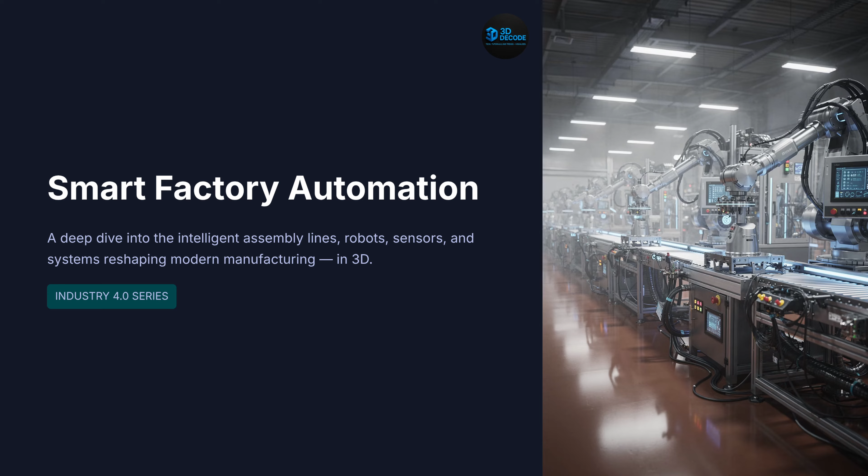Welcome to the smart factory. Modern factories are no longer just buildings filled with machines. They are becoming intelligent digital ecosystems where robots, sensors, conveyors, software, and AI systems operate together continuously. Every machine generates data, every process is monitored in real time, and every production step becomes measurable and optimizable. The factory itself is evolving into a living, connected system.

What is factory automation? Factory automation is the use of machines, robotics, control systems, and software to perform manufacturing tasks with minimal human intervention. Instead of relying entirely on manual labor, automated systems handle repetitive, dangerous, and high-speed operations with far greater consistency. Automation can range from simple conveyor systems to fully autonomous robotic production lines. The main goal is higher productivity, lower cost, improved quality, and greater operational efficiency.

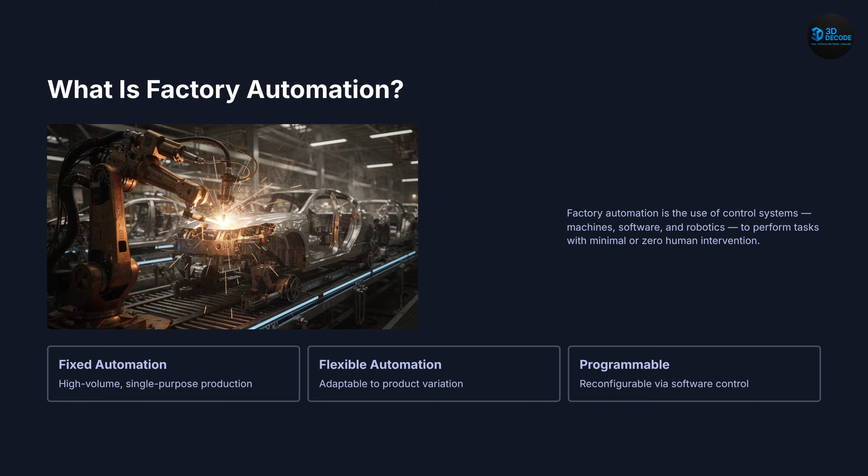Types of factory automation. There are three major categories of industrial automation. Fixed automation is designed for high-volume repetitive production with little variation. Programmable automation allows machines to be reconfigured through software for different products. Flexible automation goes even further by adapting dynamically to changing production requirements with minimal downtime.

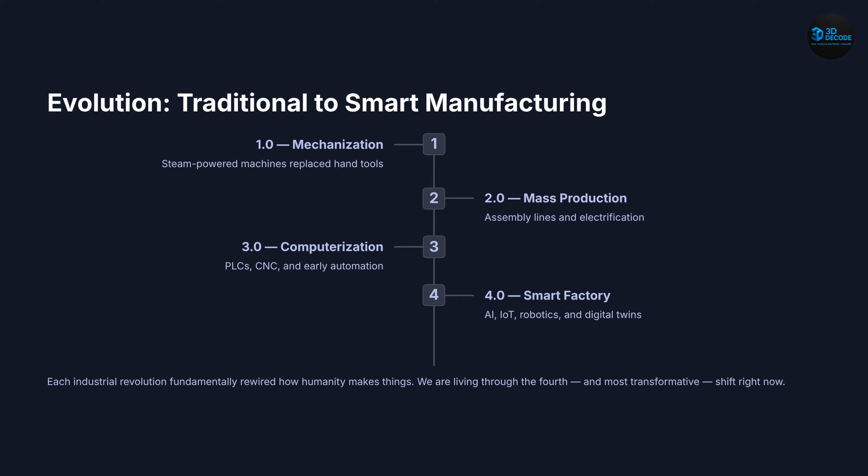Evolution of manufacturing, Industry 1.0 to 4.0. The history of manufacturing has passed through four major industrial revolutions. Industry 1.0 introduced steam-powered mechanization, replacing hand tools with machines. Industry 2.0 brought electrification and mass production assembly lines, while Industry 3.0 introduced computers, PLCs, and CNC systems. Today, Industry 4.0 combines AI, IoT, robotics, cloud computing, and digital twins into intelligent, self-optimizing factories.

What is Industry 4.0? Industry 4.0 is often called the fourth industrial revolution because it merges the physical and digital worlds together. Machines, sensors, software, AI systems, and cloud infrastructure communicate continuously in real time. Factories no longer operate as isolated machines. They function as highly connected cyber-physical systems. This allows manufacturing environments to think, adapt, predict, and optimize automatically.

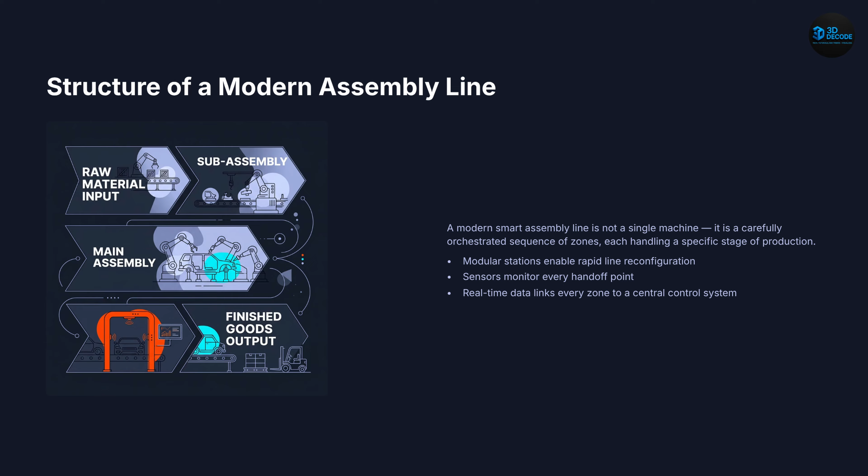Structure of a modern assembly line. A smart assembly line is far more than a sequence of machines. It is a carefully orchestrated production ecosystem divided into specialized modular zones handling different stages of manufacturing. Each station continuously exchanges data with central control systems while sensors monitor every material handoff. This modular design also allows factories to reconfigure production lines rapidly for new products.

Material flow in smart factories. Traditional factories often used push-based manufacturing, where products moved forward regardless of downstream demand. Smart factories instead use pull-based systems driven by real-time production needs. Materials move only when downstream stations request them, reducing inventory waste and unnecessary storage buffers. This creates faster, leaner, and more efficient manufacturing operations.

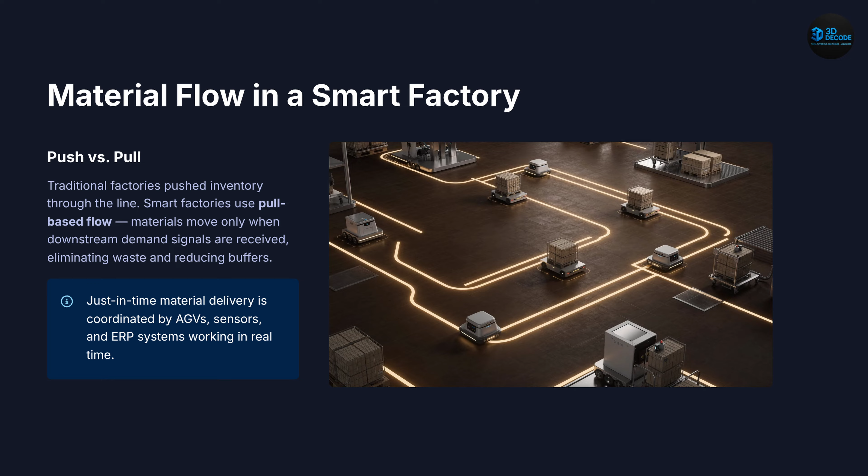Conveyor systems explained. Conveyor systems are the arteries of modern production lines. Belt conveyors transport lightweight products continuously at high speed, while chain conveyors move heavy assemblies like automotive chassis. Overhead trolley systems free up valuable floor space, and roller conveyors efficiently move pallets and containers. Modern smart conveyors also include variable speed drives, load sensors, and automatic diverter systems controlled by central PLCs.

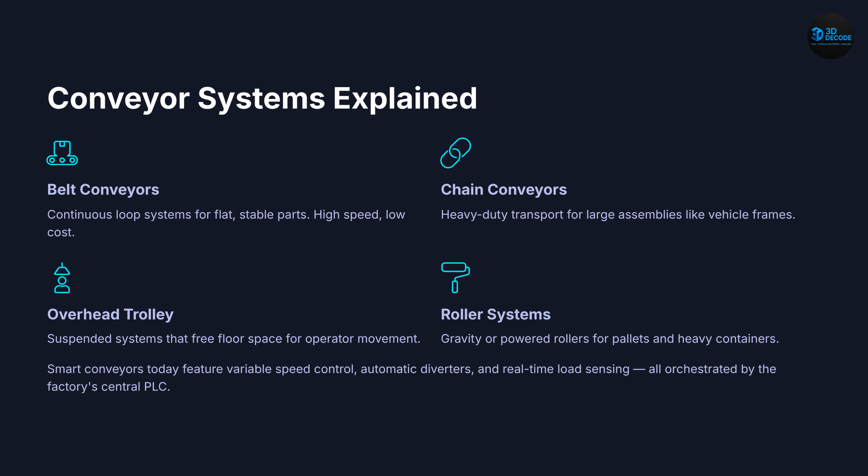Industrial robots in assembly lines. Industrial robots are one of the most visible symbols of modern factory automation. Six-axis articulated robots perform welding, painting, screwing, assembly, and material handling with incredible precision and consistency. Unlike humans, robots do not experience fatigue, distractions, or repetitive strain injuries. Many production lines now operate 24 hours a day, with robotic systems working continuously.

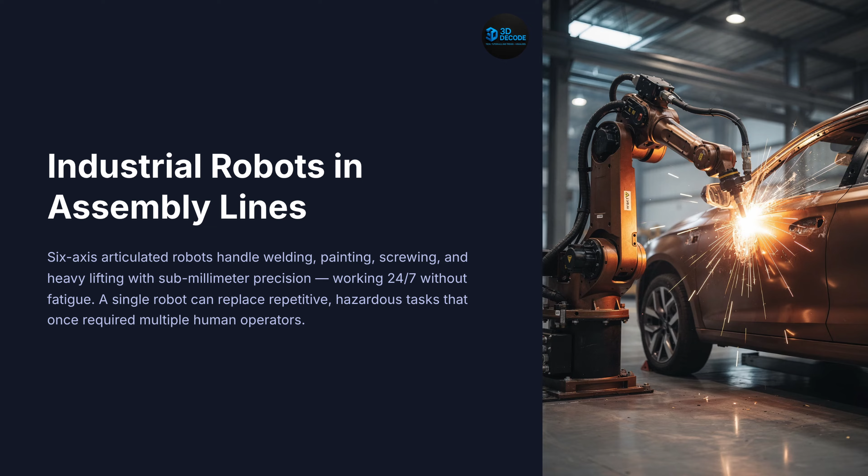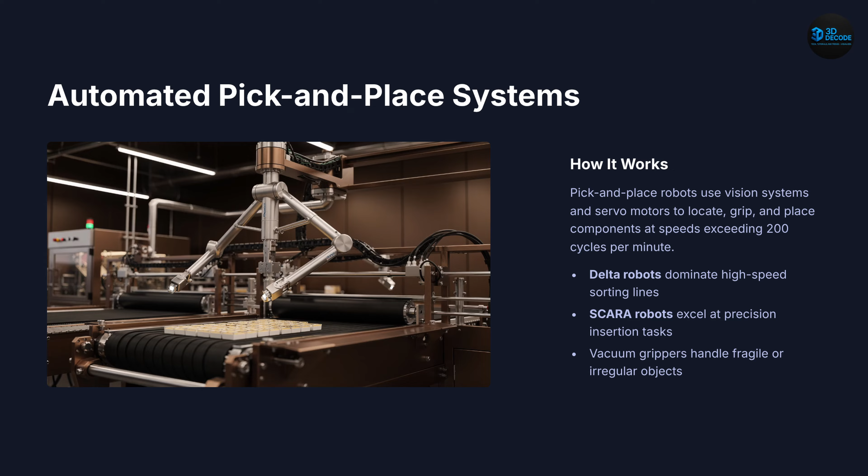Automated pick-and-place systems. Pick-and-place robots are among the fastest machines inside smart factories. Vision systems identify object position and orientation, while servo motors move the robot with millisecond-level precision. Delta robots dominate high-speed sorting and packaging systems, while Scara robots excel at precision insertion tasks. Some systems now exceed 200 pick-and-place cycles per minute.

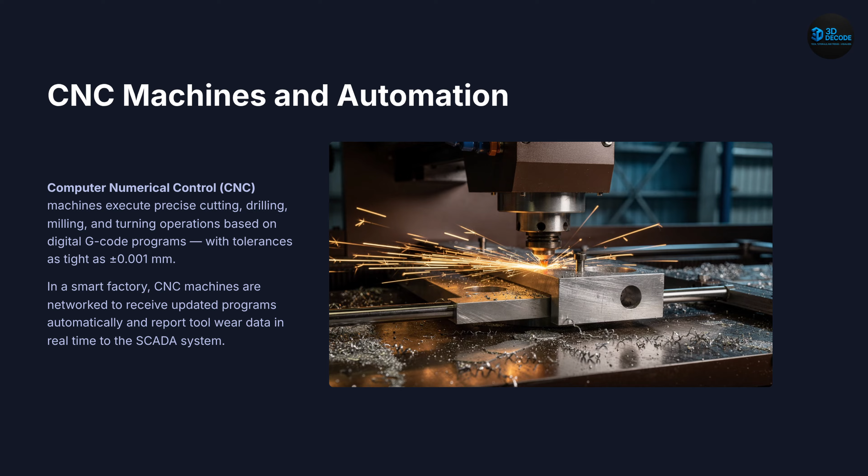CNC machines and digital manufacturing. Computer numerical control, or CNC machines, transformed precision manufacturing completely. These systems follow digital G-code instructions to perform cutting, drilling, milling, and turning operations with tolerances tighter than a human hair. In smart factories, CNC machines are networked directly into the production system. They automatically receive updated programs and continuously report tool wear and operational status in real time.

PLC, the brain of the assembly line. At the center of factory automation is the PLC, the programmable logic controller. PLCs are rugged industrial computers designed to survive heat, dust, vibration, and harsh manufacturing environments. They continuously monitor inputs from sensors and control outputs like motors, valves, conveyors, and robotic systems. Most industrial control decisions happen within milliseconds.

How PLCs work. A PLC operates through a continuous scan cycle. First, it reads all sensor inputs from the production line. Then it processes programmed logic instructions and updates outputs accordingly. This entire cycle repeats thousands of times every minute, keeping the factory synchronized and responsive.

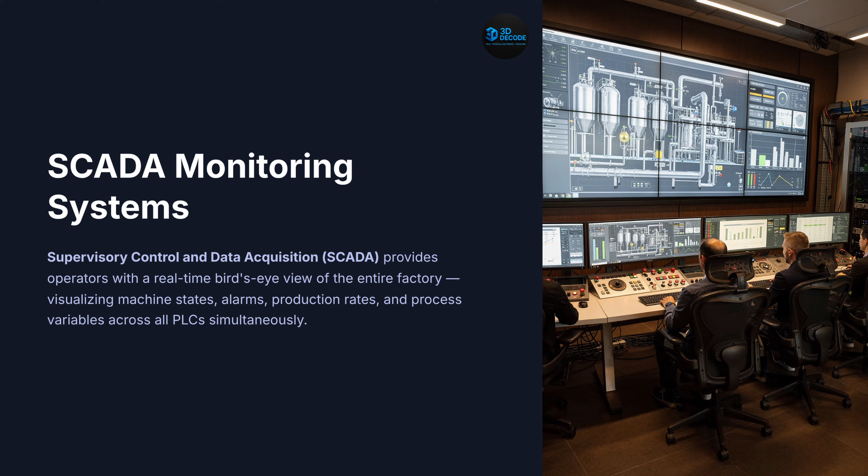SCADA monitoring systems. SCADA systems provide operators with a real-time bird's-eye view of the entire factory. Supervisory control and data acquisition platforms visualize machine states, alarms, production metrics, and energy usage across all connected PLCs simultaneously. Operators can instantly identify bottlenecks, failures, or abnormal conditions from centralized dashboards. SCADA turns raw factory data into actionable operational intelligence.

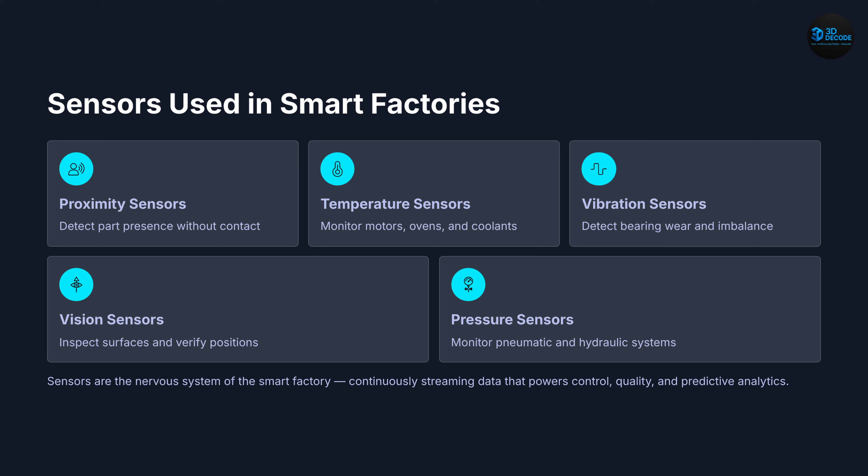Sensors, the nervous system of smart factories. Sensors are the nervous system of modern industrial automation. Proximity sensors detect parts without physical contact, temperature sensors monitor motors and ovens, and vibration sensors identify mechanical wear before breakdowns occur. Vision sensors inspect surfaces and verify product alignment continuously at line speed. Without sensors, smart factories would have no awareness of the physical world.

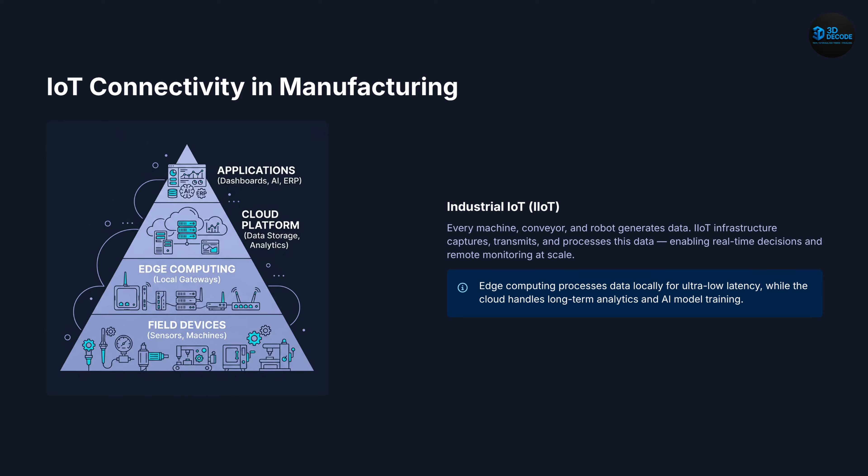IoT connectivity in manufacturing. Industrial IoT, or IIoT, connects every machine and system inside the factory network. Each robot, conveyor, CNC machine, and sensor continuously generates operational data. Edge computing processes critical information locally for ultra-low latency, while cloud systems handle large-scale analytics and AI training. The factory becomes a massive real-time data ecosystem.

AI integration in factory operations. Artificial intelligence transforms raw industrial data into intelligent decision-making. AI systems analyze production trends, optimize scheduling, predict failures, and improve quality control automatically. Machine learning algorithms continuously adapt based on operational feedback. Factories are gradually shifting from programmed automation towards self-optimizing intelligent systems.

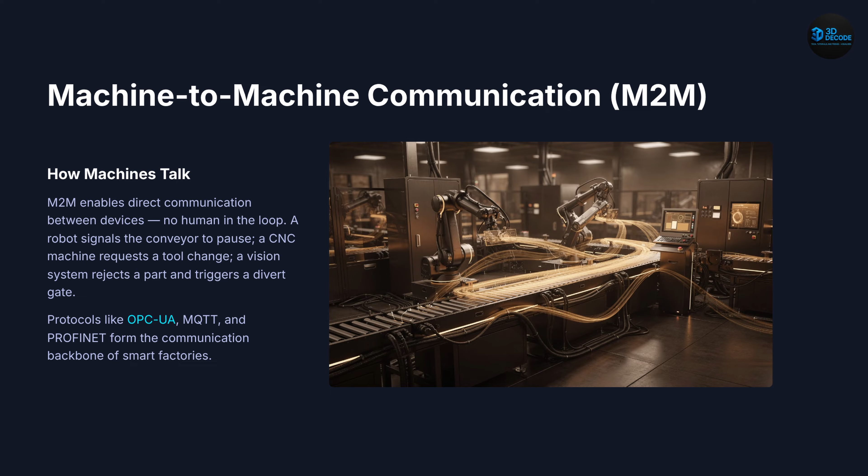Next, machine-to-machine communication. One of the most powerful Industry 4.0 concepts is machine-to-machine communication, or M2M. Machines exchange information directly without human involvement. A robot may signal a conveyor to pause, while a CNC machine automatically requests a tool replacement before failure occurs. Protocols like OPC-UA, MQTT, and Profinet form the communication backbone enabling these interactions.

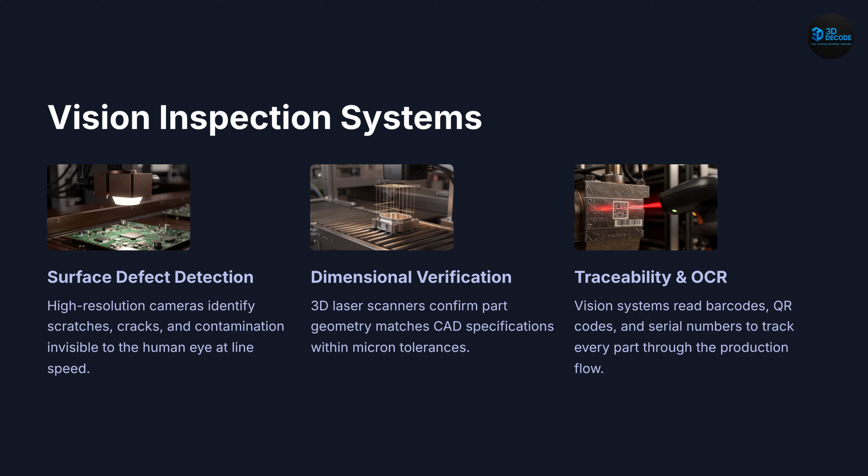Next, vision inspection systems. Machine vision systems perform quality inspection at speeds impossible for humans. High-resolution cameras identify scratches, cracks, contamination, and dimensional errors in real time. 3D laser scanners verify geometry against CAD models with micron-level precision. Vision systems also read barcodes, QR codes, and serial numbers for full production traceability.

Next, automated quality control. In smart factories, quality control is embedded directly into the manufacturing process itself. Instead of waiting until final inspection, AI systems monitor quality continuously during production. Real-time measurements compare live data against digital specifications instantly. This enables near-zero defect manufacturing with rapid corrective action before defects spread.

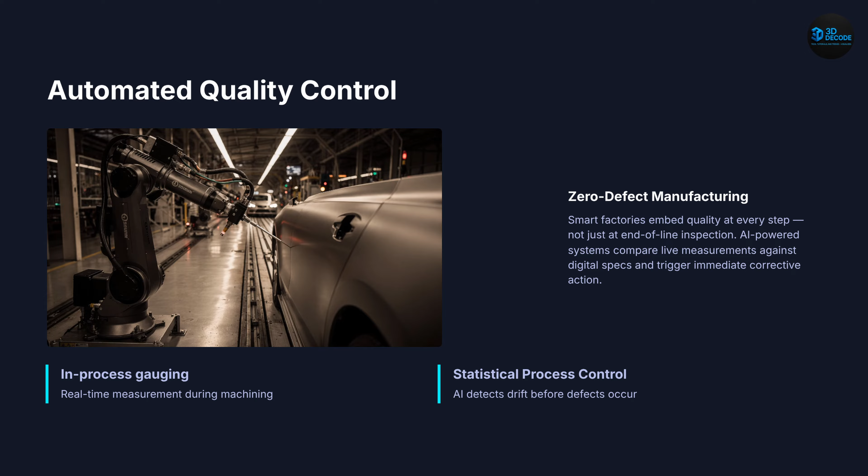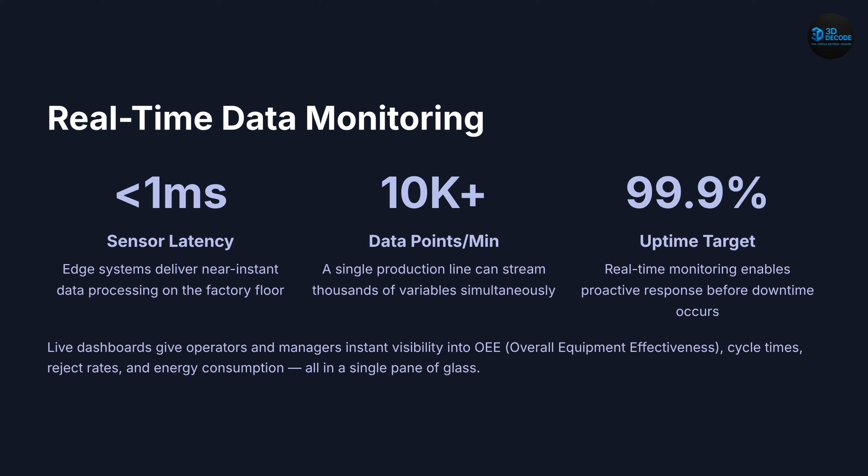Next, real-time data monitoring. A single smart production line can generate thousands of data points every minute. Edge computing systems process this information in less than 1 millisecond to maintain ultra-fast response times. Operators monitor overall equipment effectiveness, cycle time, reject rates, downtime, and energy usage through live dashboards. Real-time visibility allows problems to be identified before they become costly failures.

Next, digital twin technology. One of the most futuristic Industry 4.0 technologies is the digital twin. A digital twin is a real-time virtual replica of the physical factory synchronized continuously with live sensor data. Engineers can simulate production changes, test layouts, and predict bottlenecks without stopping the actual factory. The digital and physical worlds become permanently connected.

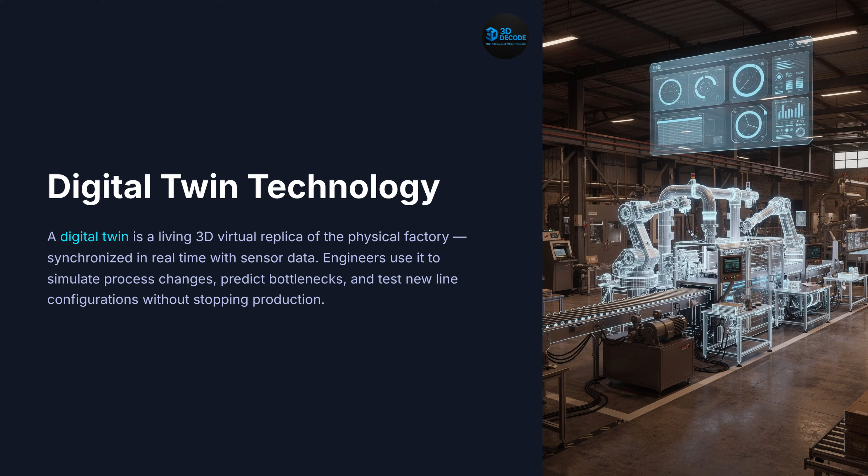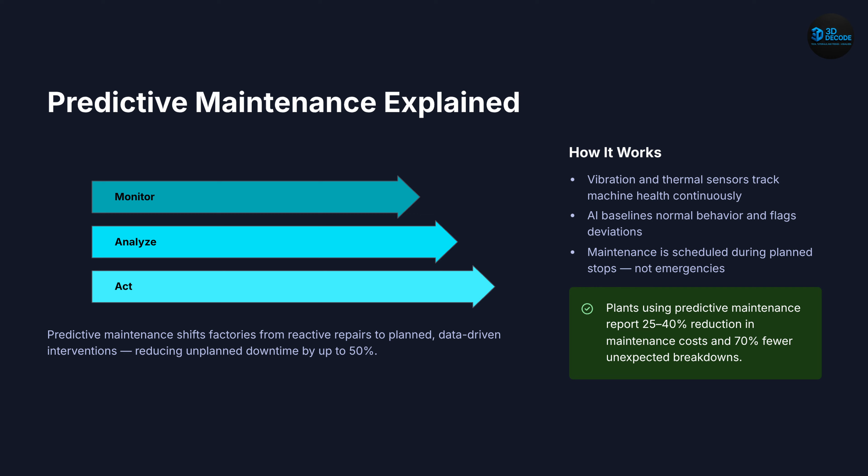Next, predictive maintenance explained. Traditional maintenance repairs machines only after failure occurs. Predictive maintenance uses AI and sensor data to forecast problems before breakdowns happen. Vibration, temperature, and current sensors continuously monitor equipment health, while machine learning systems detect abnormal behavior patterns. This dramatically reduces downtime, maintenance cost, and unexpected failures.

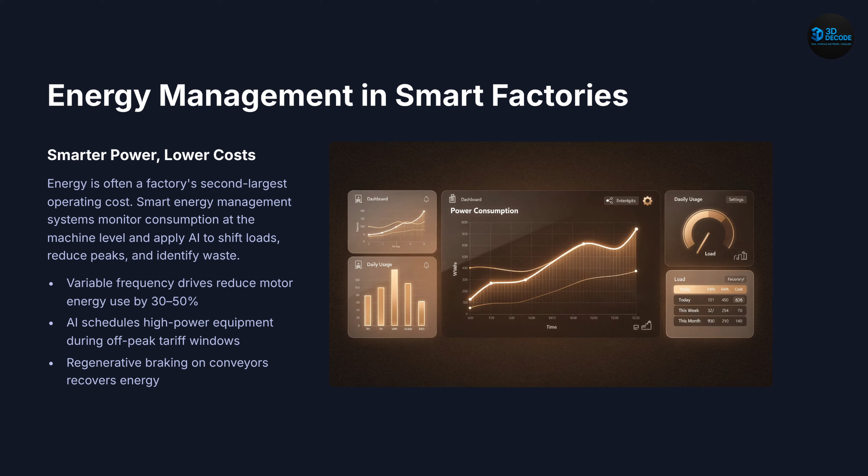Next, energy management in smart factories. Energy is often one of the largest operating costs in manufacturing. Smart energy systems monitor power usage at the individual machine level and optimize consumption dynamically. AI schedules high-power equipment during cheaper tariff periods, while regenerative systems recover energy from braking motors and conveyors. Modern factories are becoming not only smarter, but also far more energy efficient.

Next, cybersecurity in industrial automation. As factories become more connected, cybersecurity becomes critically important. A single cyber attack targeting an industrial PLC can halt production and cause millions in losses within hours. Modern smart factories therefore use encrypted communication, network segmentation, AI intrusion detection, and multi-factor authentication systems. Protecting operational technology networks is now a major industrial priority.

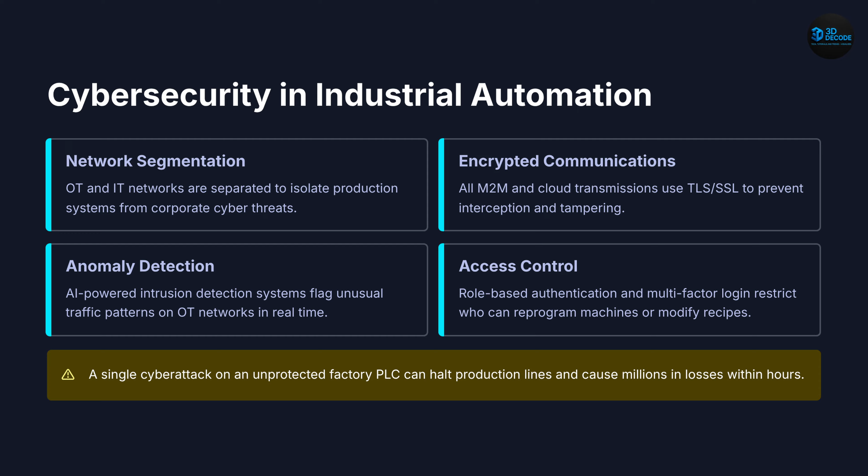Next, human-robot collaboration: cobots. Collaborative robots, or cobots, are designed specifically to work safely alongside humans. Unlike traditional industrial robots operating inside safety cages, cobots use force-limited motors and advanced sensors to stop instantly upon contact. They handle repetitive or physically demanding tasks while humans provide judgment and flexibility. This creates a cooperative human-machine workforce.

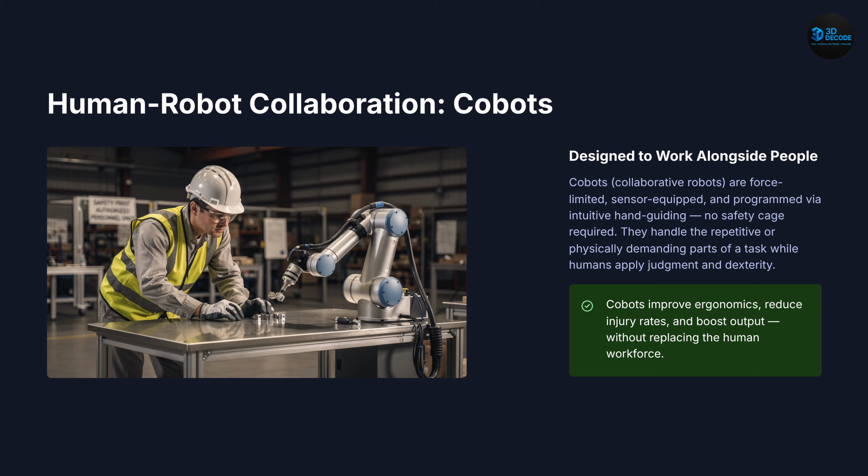Next, benefits of smart factory automation. The advantages of smart factories are enormous. Automation increases productivity, reduces defects, improves flexibility, and lowers energy consumption. AI-driven systems maintain near-zero defect rates, while robotic operations run continuously without fatigue. Factories become faster, smarter, safer, and more sustainable simultaneously.

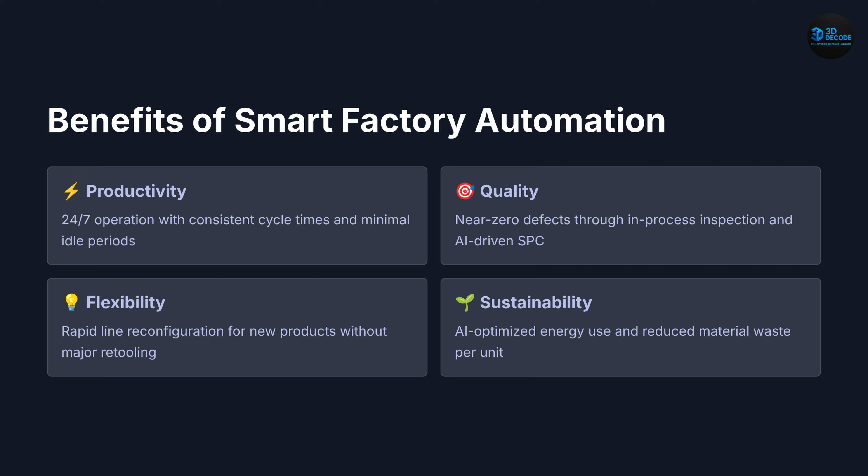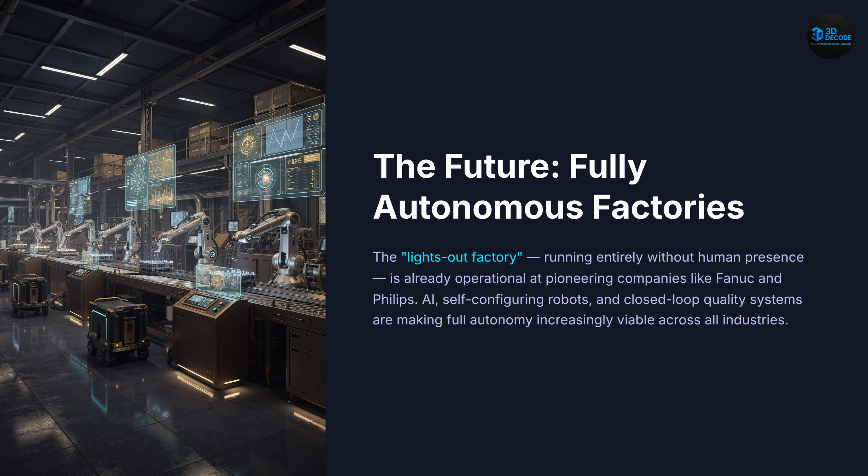Next, fully autonomous factories. The ultimate Industry 4.0 vision is the fully autonomous lights-out factory. These factories operate with minimal or even zero human presence, while AI systems coordinate every aspect of production automatically. Companies like Fanuc and Philips operate autonomous facilities today. The future factory may eventually run continuously without human intervention.

Next, the factory of the future. The factory of the future will combine intelligent sensing, connected infrastructure, AI-driven decisions, and human-machine collaboration into one unified ecosystem. Digital twins will allow factories to learn continuously and optimize themselves automatically over time. Humans will increasingly supervise, innovate, and collaborate with intelligent robotic systems rather than perform repetitive labor directly. Manufacturing itself is becoming a living digital system.

Final takeaway. Smart factory automation represents one of the most important technological transformations of the 21st century. Industry 4.0 combines robotics, AI, IoT, cloud computing, and real-time data into factories capable of thinking, learning, and adapting continuously. The traditional assembly line is evolving into an intelligent, connected ecosystem, and the factories of the future are already being built today.